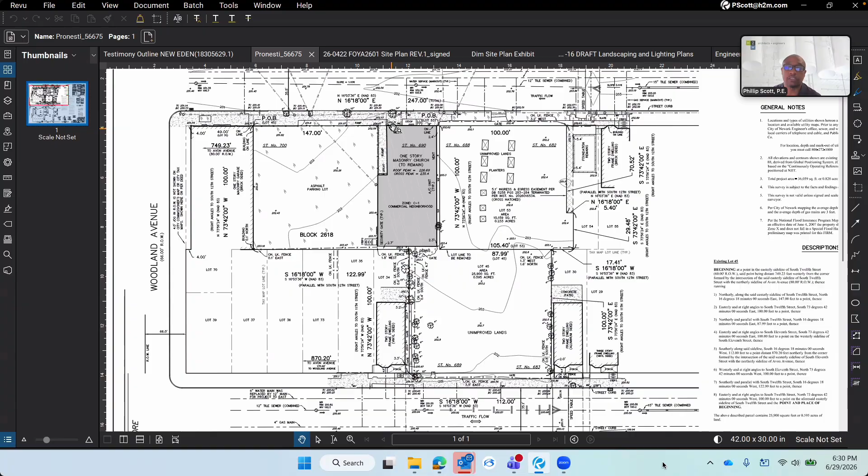One thing mentioned in the engineering review is that we have some encroachments into the right of way, shown here. There's a handicap ramp in the right of way that allows accessible people to get up into the church, and there's a stoop, which is the front stairs to the church. Both of these are existing and have been here for many years. As part of this application, we will address these encroachments as best we can.

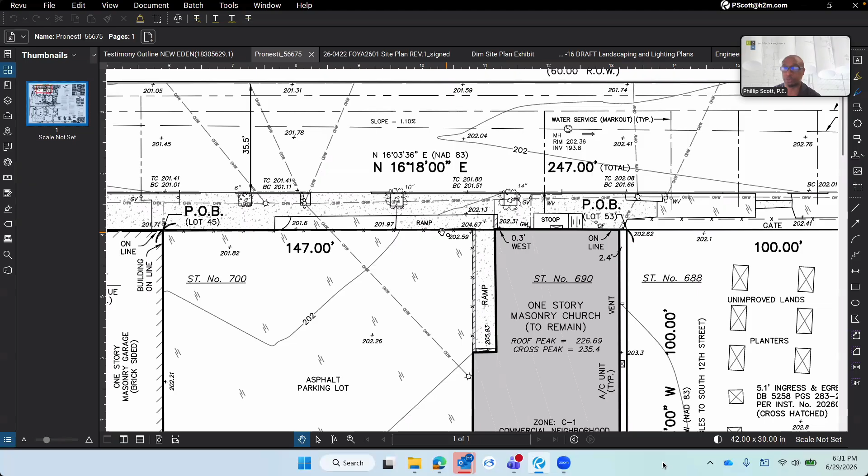Going down to the subdivision plan, all we're really doing is proposing this new lot line and removing the previous lot line. The total area of the project will remain the same - we're just reconfiguring the lot to make room for the new multifamily apartment building.

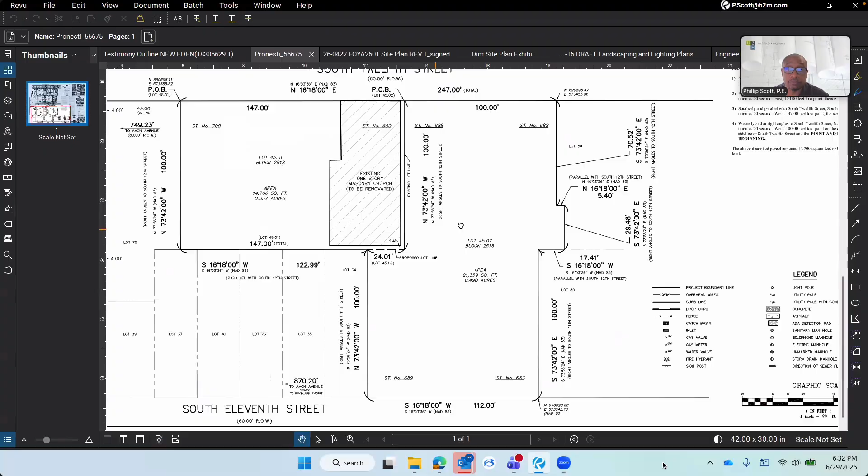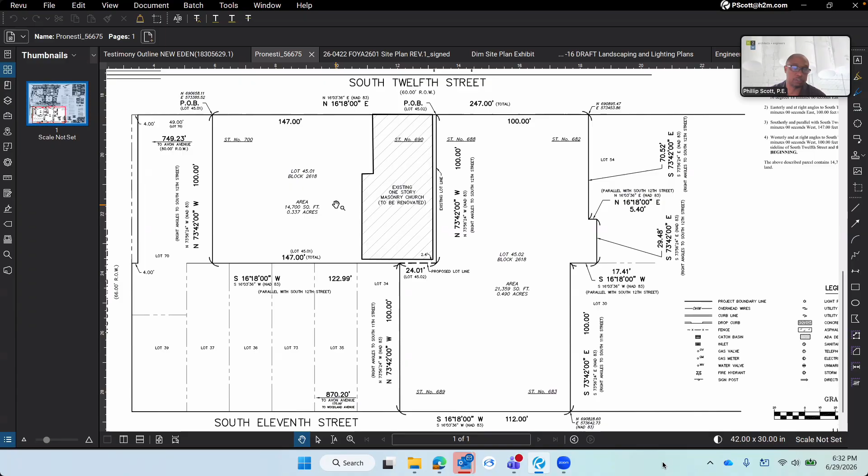Mr. Scott, just to clarify, the existing two lots, 45 and 53, will be joined, and the new lot 45.01 is where the existing church and associated parking will be, correct? That is correct. For the church lot, 45.01, the area will be 14,700 square feet or 0.337 acres. The new multifamily building lot will be 45.02, with 21,359 square feet or 0.49 acres, just under half an acre.

To your knowledge, Mr. Scott, there are no easements or title issues related to those two properties, correct? That is correct.

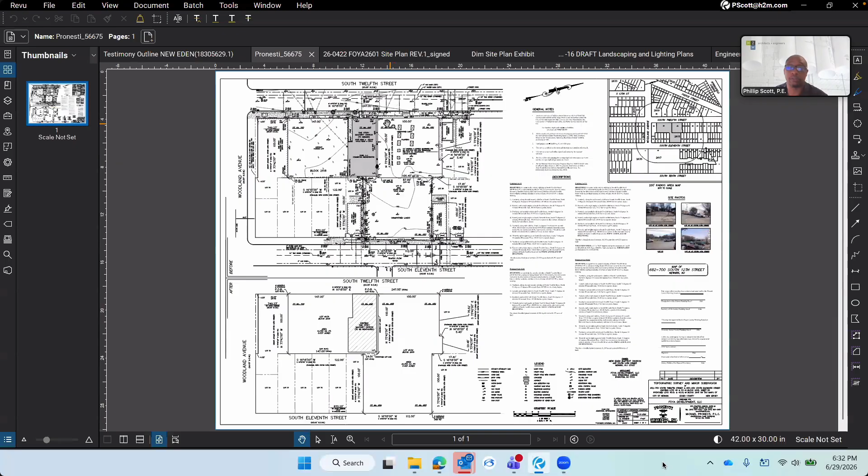Moving on to the site plan prepared and submitted as part of this application - when we initially made the submission to the city, we did not show any improvements on the church property. As part of the review, they asked for a few things, including striping the actual parking lot, which currently has no formal striping. People probably park the best way they can on days there are activities at the church. We are now showing striping providing, I believe, 22 spaces on this plan.

There has been another revision since this plan was done, which I'll show later as an exhibit. Another request was to create a buffer between the church property and the residential properties in this area. So we are providing a 15-foot buffer, cutting back the asphalt of the parking lot to create this area, which we will landscape, as shown on one of our later plans.

Additionally, with this plan, as we mentioned, we're proposing a new building. It's a fully affordable, 100% affordable apartment building that's going to have access from both South 12th Street and South 11th Street. They'll be able to access either way, in either direction, and can go both in and out onto South 12th Street or South 11th Street.

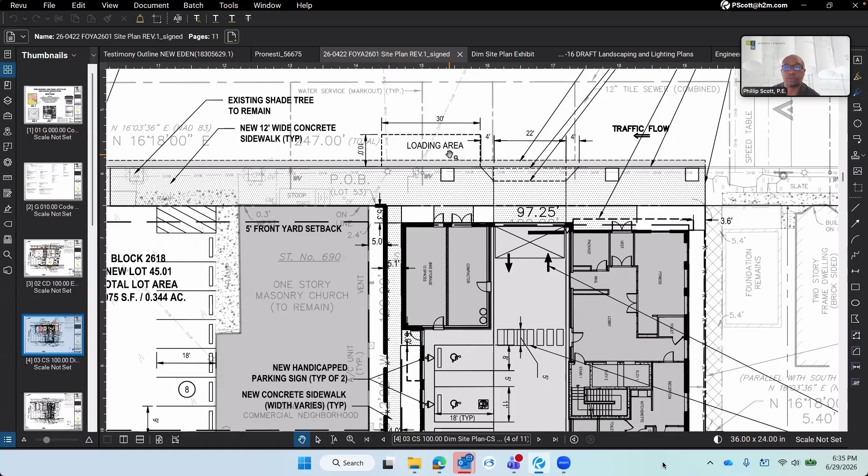In our plan, we are showing a loading zone, which we are fully prepared to make an application for to the Department of Engineering, Division of Traffic and Signals, if this project were to be approved. This is an area so that we can have loading and unloading for people coming to either the apartment building or the church.

Also with this plan, we're proposing a new curb and new sidewalk along the entire frontage of both the church lot and the apartment building lot on both South 12th Street and South 11th Street. And we're also proposing a play area for the children who will be living in the new apartment building.

We will also be proposing to make our utility connections onto South 11th Street. We'll have our two water connections, our sanitary sewer connection, as well as a doghouse manhole that will connect our overflow from our stormwater system. As part of that, we know that with the number of connections we have, we're willing and ready to pave the street along our frontage as required by the city.

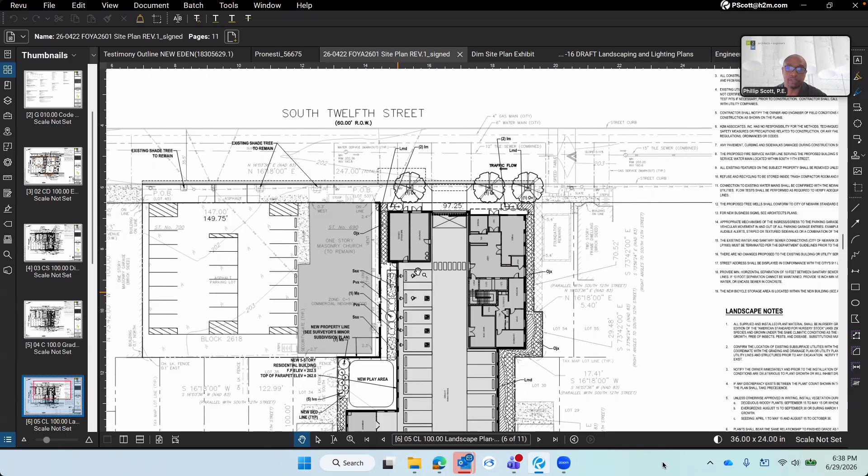Okay, so our next plan is our landscaping plan. This is the plan that was submitted after our TRC meeting - I'm sorry, prior to our TRC meeting. As you can see, we have some street trees along South 12th Street, in accordance with the city's ordinance on street trees. We're providing landscaping as best we can around the foundation of the building, all the way around, and we're also providing the same street trees along the South 11th Street frontage.

As part of the TRC meeting that we had with the city, there were certain requirements that they asked for with regard to improvements on the church lot. So I had prepared this exhibit, which is shown here.

If I can, Mr. Scott - I apologize, Mr. Black, I'm going to mark this as A1, the revised landscaping plan. Okay, thank you. This plan has already been submitted to the city and has been reviewed by the Department of Engineering.

As we can see here, we still have all of the same landscaping, but in this area where a buffer was requested, we're providing plantings along here as well. We also show some plantings along this area here, but there's been some changes and we're still working through it. We'll work with the Department of Engineering to see if we'll still do this landscaping or if they'd prefer we widen the drive aisles a bit, as mentioned in one of the comments in the review letter.

That's our landscaping plan. Our next plan is our lighting plan. We have interior lighting in the apartment building. Mr. Scott, I apologize, I just wanted to go back.

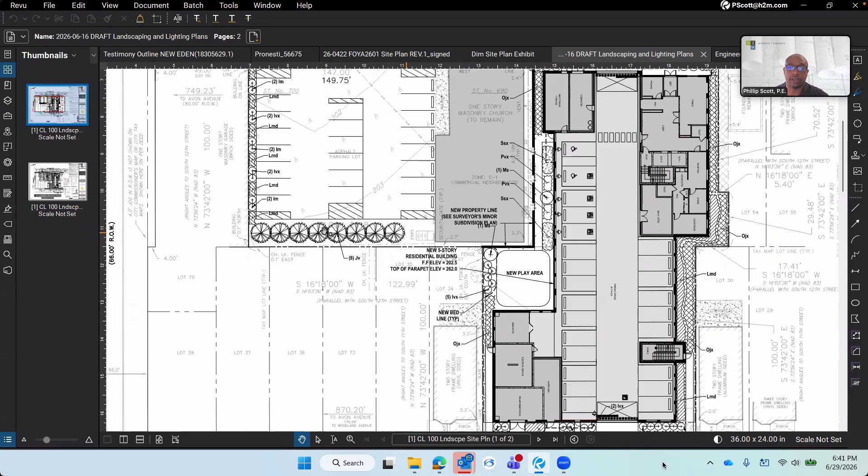Not a problem. You had indicated that the buffer area proposed along the rear, abutting the residential properties on South 11th Street, will extend all along the back of the parking lot, correct? Yes, that is correct. Parking lot, not garage -- the parking lot along the back of the paved lot for the church, correct? Yes, this area here, which right now is all paved up to the property line. We will be cutting that back and adding this landscape area. Okay, great.

So I'll move on to the next plan, which is our lighting plan. In the garage, we have lighting. I believe there were some comments from the engineer about excessive light spilling out of the garage, which we're willing to adjust and make whatever changes are recommended by the Department of Engineering.

As part of our TRC meeting, they requested we show the existing lighting in the church parking lot. So we modeled the lighting for the church parking lot, and we have a little bit of a dark spot over here in this one corner. We have, it looks like, 3 or 4 different locations where we're under the minimum of 0.5 foot candles.

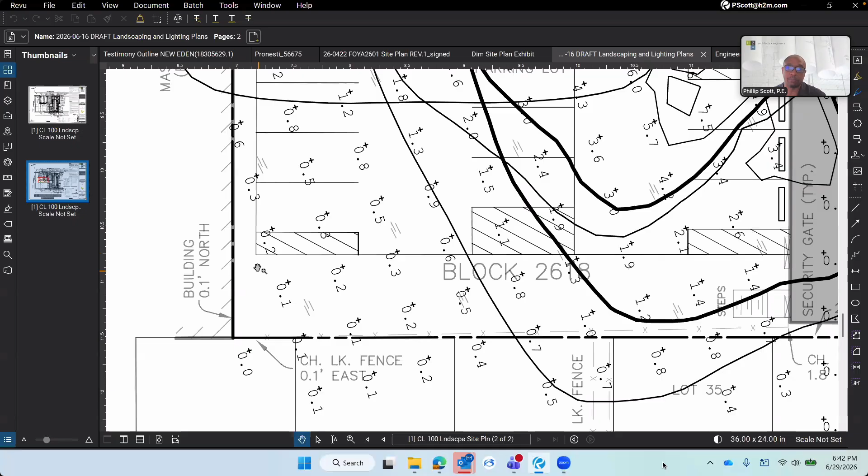One of the comments from the Department of Engineering is that we add a light pole in this corner. It's a bit much of a task to ask the church to run a new pole there. So what we're going to do, and we'll model that as part of our resolution if we're approved, as a condition of the resolution, is look to maybe change out one of these fixtures so we can get enough lighting to cover this one little dark spot in this corner.

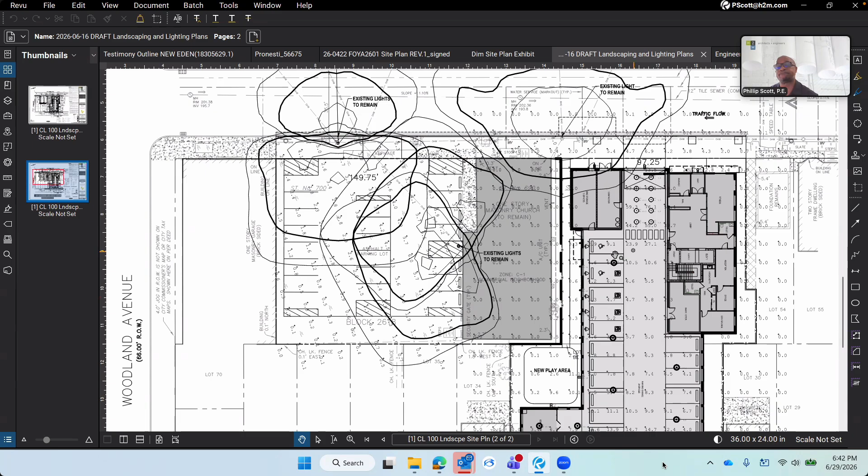So it'd be fair to say that for the lighting on the proposed lot 45.01, we will try to work with the city to ensure we can satisfy those lighting requirements, correct? That is correct. Okay.

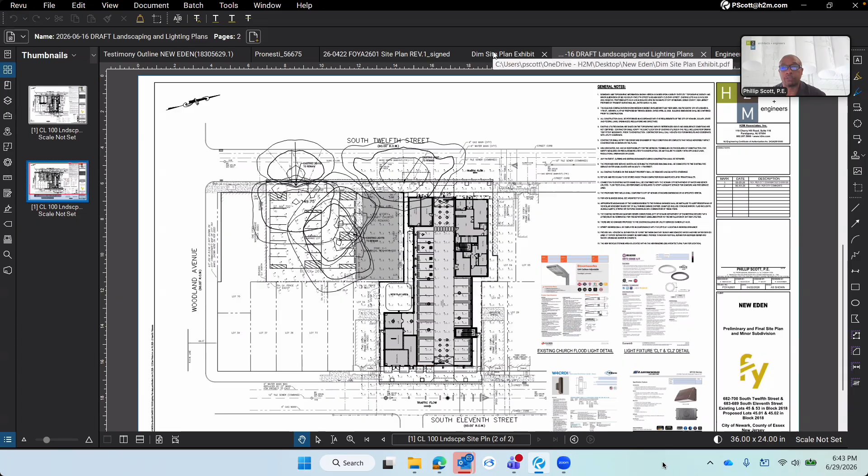There's one other thing I mentioned before, and that was us relocating the handicap ramp on site. So on this plan, this would be another exhibit which was not submitted to the board, but was prepared in preparation for this meeting.

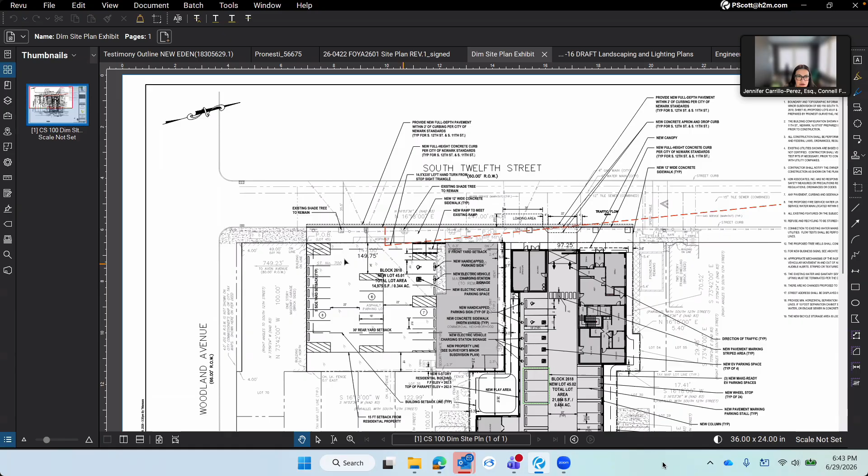Thank you. This plan here, we will work with the Department of Engineering. As I said, we tried to expand the drive aisle as much as we can. We were able to get 22 feet as opposed to the 20 feet we previously had. We moved the handicap ramp, which was out here in the right of way, which was an encroachment. We moved it on site so it will no longer encroach on the property, but we did lose one parking space.

The current requirement for the church is only 15 parking spaces. In our previous plan we had 22 spaces. Now with this plan we show 21 spaces. But with this plan we have a van accessible handicap parking space here, and an EV electric vehicle charging space here, which was also requested by the city's professionals.

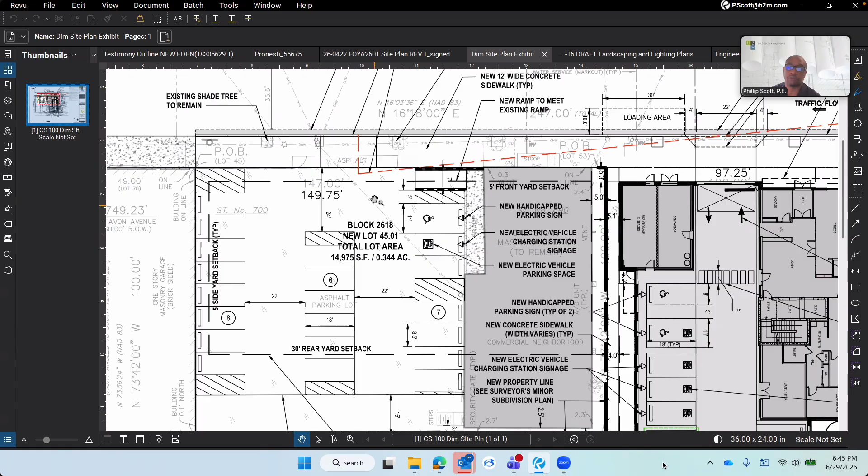The one good thing about this plan is that, yes, we lose one parking space, but we now take the handicap ramp out of what is shown here in red, the sight triangle. This makes for a clear line of sight and a much safer situation for drivers pulling out of the driveway. And that pretty much concludes my testimony.

So I just have a few clarifying questions. As it relates to 45.01 on this lot, the EV make-ready space, one required, we agree we will comply, correct? That's correct. The parking spaces, you indicated our original submission had 22 spaces. We did a modification to remove an encroachment, which allows us to still have 21 spaces, and that is adequate given the space of the existing church, so no variance is required there. Is that correct? That is correct.

Okay, great. The landscaping, we went through that earlier with the buffer area and the trees. I just wanted to clarify there's no variance required on site. The shade trees, there are 4 required, and I think we have 3 that are pre-existing. Is that correct? Yes, I will go back to that plan if you'd like.

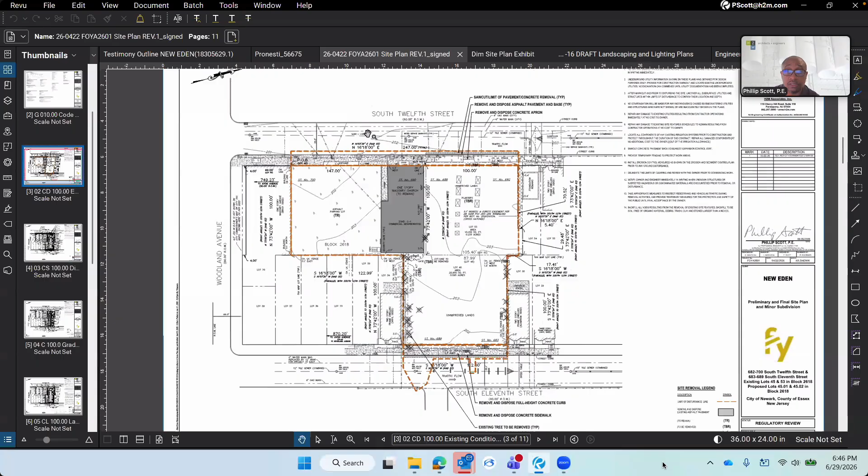So yes, there are existing trees. It's a little hard to see on this plan, but there are tree wells and tree pits along the frontage of the church property. So yes, there are 3 existing trees, and we show new proposed trees as well.

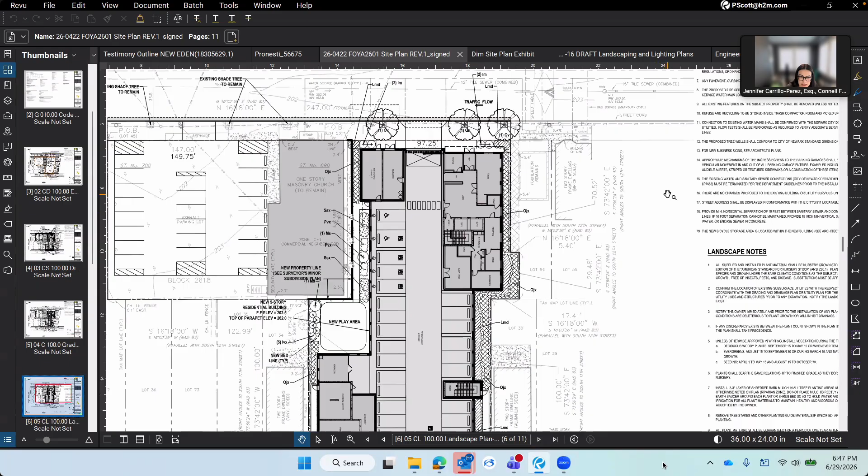One of the comments in the reports we received from the department, I believe from the planners or the Department of Engineering, is that we will agree to work with the city arborist as it relates to the species and location of the plantings. Is that something we can confirm on the record we're agreeable to? Yes, we are totally agreeable to that.

Perfect. Just clarifying, as it relates to the lighting, both on the existing lot where the church is and on our new project, we will comply with the lighting. Is that a fair representation of your testimony? Yes, that is correct. The encroachment as it relates to the concrete ramp, you've indicated that will be relocated, correct? That is correct, yes.

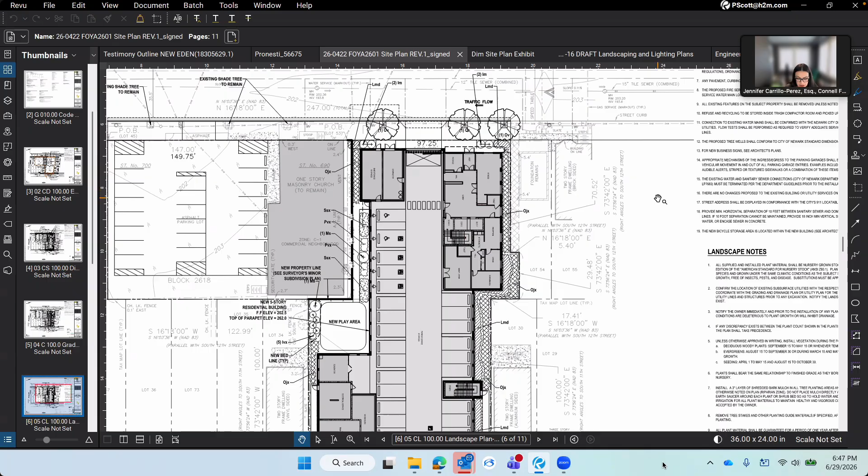And I think there was some testimony requested from Mr. Traficante's report as it relates to the chain link fence at the rear of the property, adjoining lots 36 and 37. Yeah, there's a chain link fence, it looks like it's here. I believe it's lots 34, 35? Yes, the chain link fence shown here is existing.

And that will remain on the property, is that correct? That will remain as long as the professionals allow for it. If they require us to make a change, I can't speak for the developer or the church, but we're not touching anything in that area, so we feel it can remain.

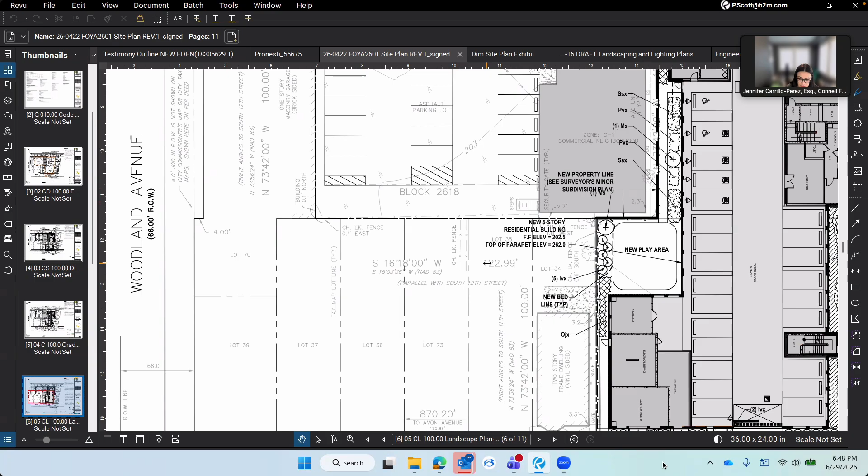There's another comment regarding an encroachment with an existing building on lot 70 that crosses very minorly, by 0.1 feet. I'll certify on the record that the applicant church, maintaining ownership of the lot and building, will work with their neighbors. It is so minor, I think we will certainly address it during resolution of compliance, but I wanted to address it since testimony was being requested on that.

As it relates to the new building proposed on 45.02, you walked through the landscaping plan. We discussed the lighting plan will comply, is that correct? Yes, we will comply. And you discussed briefly the parking lot, but we do have our traffic expert who will go through the details of his study, including the curbs.

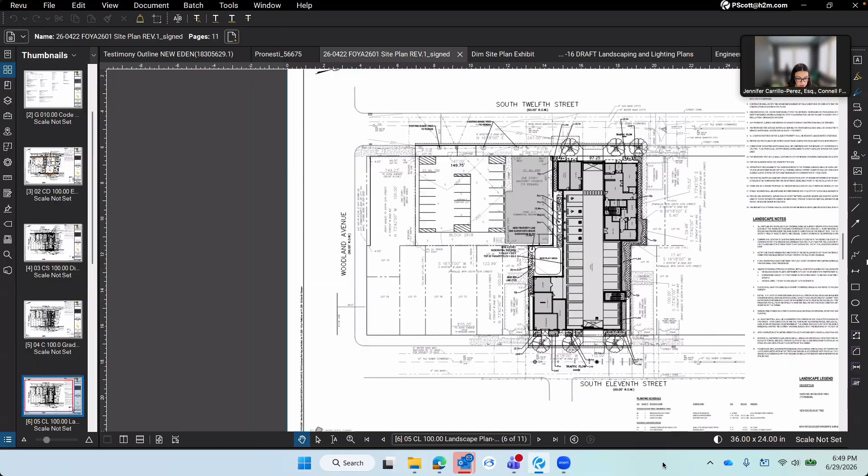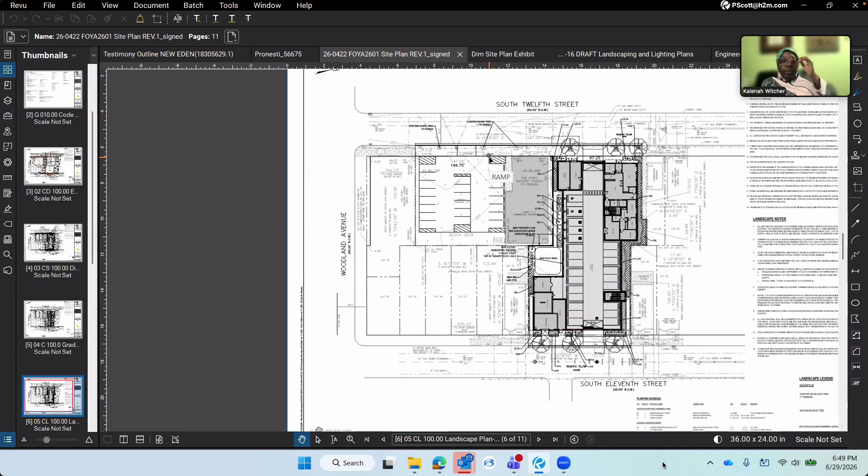You had the opportunity to review the Department of Engineering and the planner's memo, correct? Yes, I did. And with the exception of those we went through, is there anything else you don't think you can work or comply with from those departments and the recommendations that were requested? Outside of the things I mentioned in my testimony, I think we can comply with everything else in those letters. Thank you, I have no additional questions. All right, Mr. Scott, if you could please relinquish the screen.

I have a question. My question is, how many of the variances did we just eliminate? Are you keeping count? Unfortunately, I'm not keeping count, but we will have a professional planner who will provide testimony at the end, and he will give a summary on the variances that will still remain, that we will still be requesting for this application.

I can tell you the variances related to lighting have been eliminated. So that's the illumination, walkway illumination and building entrance. Correct, all illumination variances — I think there were three or four identified, both in Ms. Gruel's report as well as Mr. Traficante's. We will work to eliminate those variances completely.

We still have a variance related to the drive aisle width — 24 is required on that one lot, 45.01, but we are increasing it, so it's 22. And the setbacks remain, and we still have additional testimony that will provide more information. But it should also be noted that the parking count is now 21 on that one lot, since we've relocated that encroachment, so that encroachment has been eliminated.

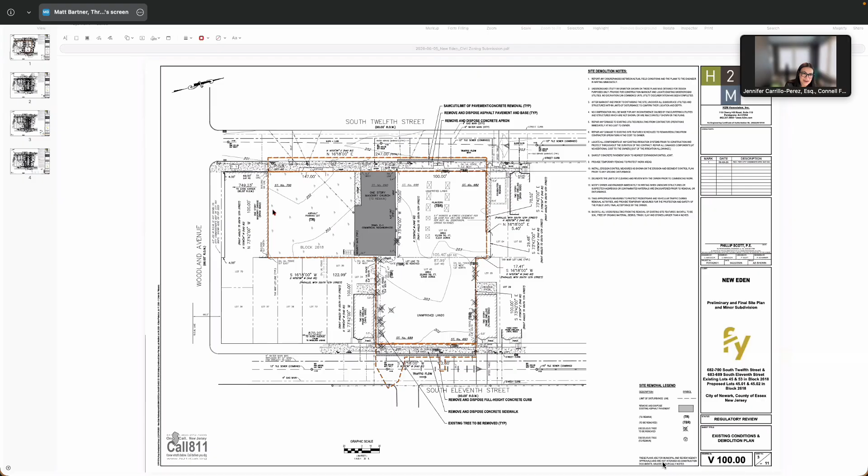Thank you. I just want to make sure everyone has seen my screen with a floor plan on it. You can, yes. Okay, great. So thank you, members of the board, for having me here to talk about the project. I will try not to repeat the testimony from other professionals as we're getting into the second hour of the hearing tonight. The building is located on the South 12th and South 11th Street, 600 block of those streets. My plans today are rotated 90 degrees counterclockwise from what we saw in the civil plans. So 12th Street is on the left-hand side, 11th Street is on the right-hand side, and north is upward on the site. We've talked about the number of apartments, and I'll get into that further as I walk through the plans.

To begin on the ground floor, on the 12th Street side of the building, we have our main entrance to the apartment building, which includes a vestibule and a lobby with space for residents to gather and congregate, as well as wait for a ride or somebody that they'll be meeting. We also, on the street side, have the entrance to the parking garage that we've discussed previously. Moving south from there, there is a trash compactor and a recycling collection room. Trash receptacles will be stored inside this building and then pulled out through double doors by the trash truck provider when they're ready to pick them up.

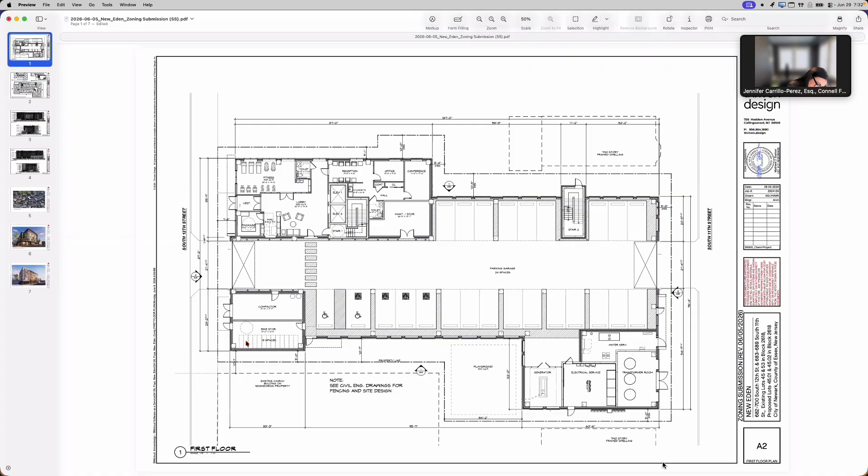The building itself is set back on 12th Street and 11th Street from the property lines approximately 5 feet. In both cases, we were trying to give a little bit of room to the public realm outside of the building, since this is a taller building than some of the other adjacent properties. We also tried to align, particularly on 11th Street, where the fabric is more intact across the street, with the mass of those buildings, although they each do have some porches that project closer to the property line, which sets the official required setback. We kept the mass of our building aligned with the mass of those adjacent buildings to maintain the desired streetscape image.

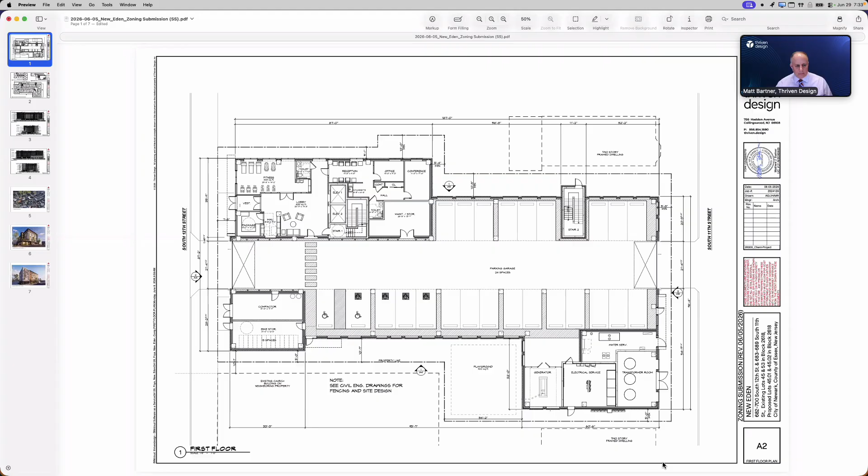All right, I will move to the upper floors of the building. On the upper floors, primarily this is focused on the apartments for the residents. So on the second floor, we have 10 apartments, and then on the upper floors, 3 through 5, we have 11 apartments. The difference in that one apartment on the second floor is in this area here, adjacent to the stairs.

We have a large community room for use of residents. That includes a kitchenette within it, an area for computer use by residents and children in the community room, and 2 bathrooms to serve the users of the community room. On the north side of that community room, on top of the roof of the management area, there is a roof deck outdoor space for residents.

As we'll see in some of the elevations of the building shortly, we're focused a lot with this building on creating softer green edges to the building and the spaces. One of those is at the roof deck, which allows us to screen the deck from the adjacent properties so that there's no disturbance between users of the roof deck and people that might live directly next door.

On these upper floors, the two elevators mentioned previously from the lobby, as well as the stair, come up to an elevator lobby with a small sitting area. Then we have a number of apartments around the whole perimeter of the floor. Across from the elevator lobby area is a trash room, which has trash chutes for recycling and for trash, so that those can be collected down in the compactor room on the first floor that I mentioned earlier.

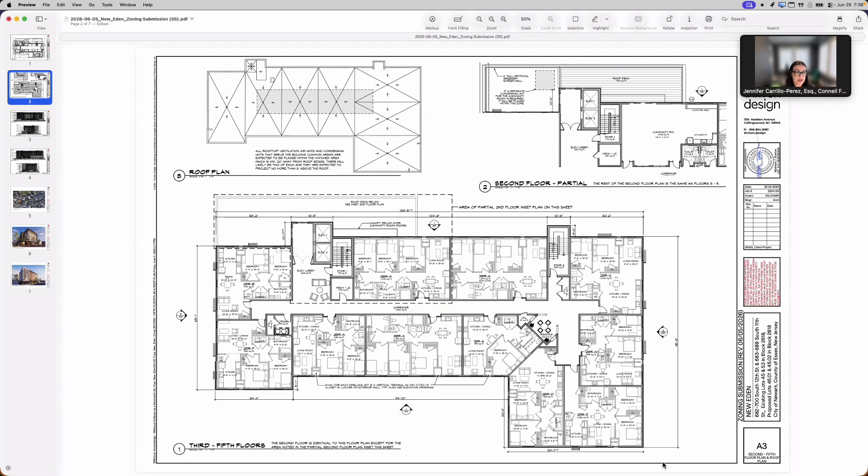If you can just proceed now on that. I think if we can go into building materials and signage, yes.

Not to spend too much time on this, but with the design we wanted to create something that was in scale and of a type with other new development happening throughout the city and in the South Ward. I talked earlier about some of the setbacks aligning with adjacent properties where we could.

The building itself is a mixture of brick, red brown brick at the base, obviously a very common material in Newark, as well as fiber cement panels up above on the upper floors. The lighter areas of fiber cement have a variation in the tones of grays and browns to give a little bit of variety.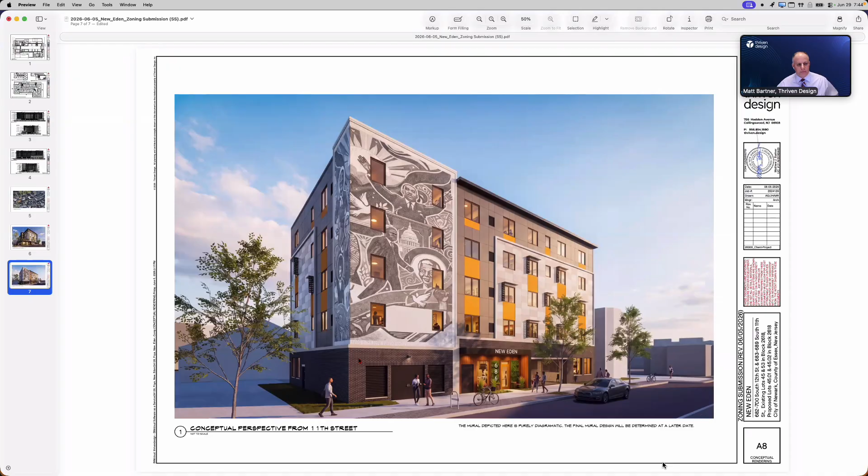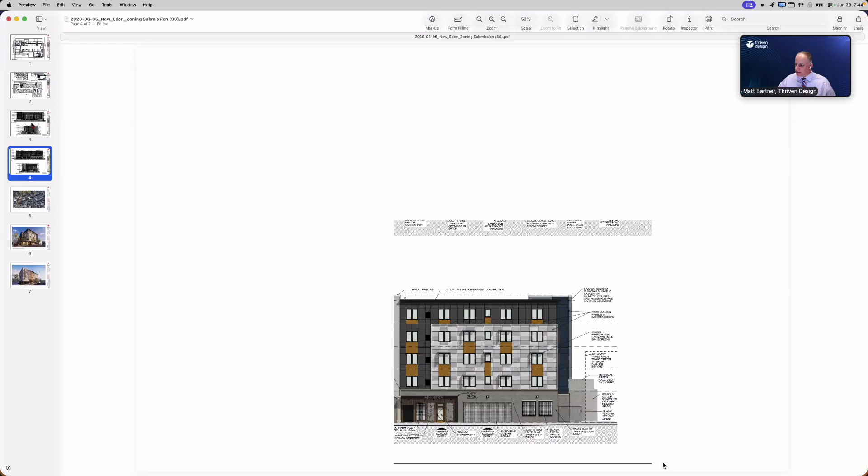On the long sides of the building, which face the other lots on the north and south sides—I apologize, this will just need a minute to queue up.

Again, it's a similar mix of materials with brick at the base on the ground floor, fiber cement panels, the dark windows at the upper floors, and a mix of whites, tans, blue, and a darker gray.

The garage itself has many openings all around its perimeter where we have exterior wall. Those openings will be filled with a screen material to keep the garage secured from the exterior, but still allow light and air in, so it doesn't feel like an enclosed cave type of garage.

It's much more open. This is the north elevation, the north side of the site, and the roof deck is here, in the center at the second floor.

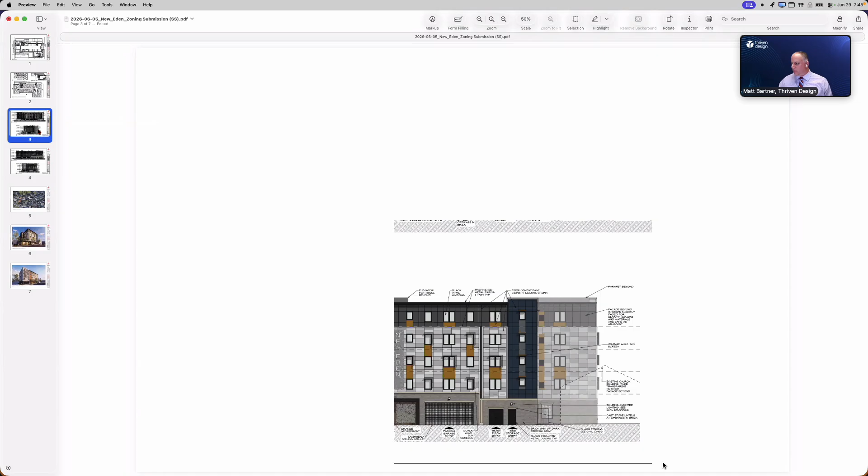And then on the south elevation—pardon me, it takes a second to load. Here we go. Again, you can see all these openings for the garage to provide light and air into the garage, and then the upper floors with the apartments as well.

As far as some of the other features, and this addresses some of the items in the review letters, these buildings, by virtue of being funded by low-income housing tax credits, will comply with Energy Star requirements and the Enterprise Green Communities criteria program as well.

The roof will have a high SRI. Plumbing fixtures will all have low flow and use less water than typical code minimums. The building will be built with recycled materials, and we'll also be recycling construction waste during construction to reduce landfill. All materials used in the building will address indoor environmental quality, with low emittance of volatile organic compounds, contributing to good air quality for people with conditions like asthma so they can live more healthfully in the building.

Mr. Bartner, you've had the opportunity to review the reports from both the engineer and the planner, correct? Yes. And as it relates to items within your expertise as an architect, is there anything that would prohibit you from making the modifications or recommendations they're suggesting? I'm looking here just to double check.

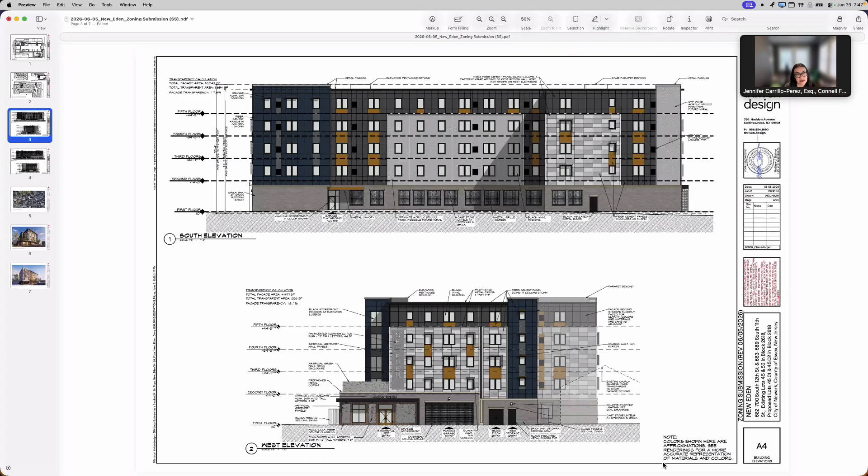No, there's not. And just to clarify, the variances being sought as it relates to transparency will remain, correct? Yes, as we proposed here. And then there was an additional variance as it relates to the signage at the initial application. Because there are two street frontages, three signs were being proposed, and the ordinance only permits one, correct? Yes, on South 12th Street, the image we're seeing here, we have three individual signs: one that says New Eden vertically, one that has New Eden horizontally, and the street number, 686.

Based on the review letters, are there any modifications being made to the signage proposed? Yes, we'd like to propose removing the larger sign that runs vertically and maintaining signage above the entry and signage to the side of the entry. So reducing from three on this frontage to two signs.

So just to recap, instead of three, we're proposing two, the side signs, and the actual area of the signage, you're agreeing to reduce it to comply with the ordinance. Is that correct? Yes, that is correct. So we'd be removing that one variance as it relates to the excessive signage area, correct? Yes.

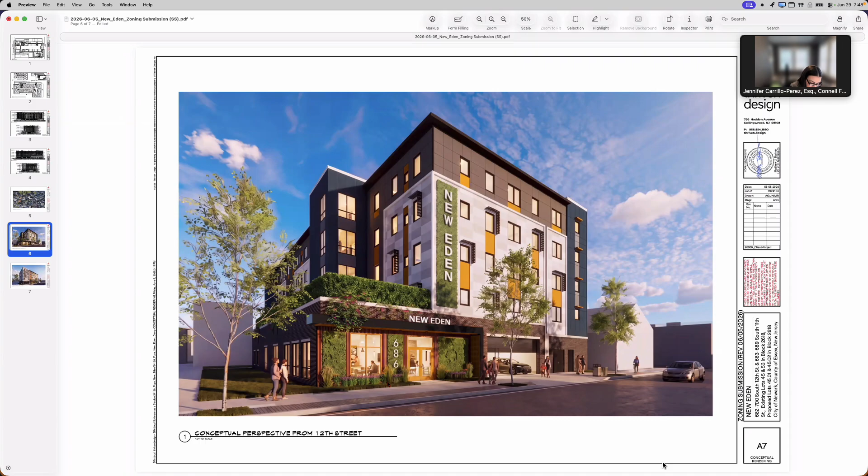Just for clarity, I apologize. I have no additional questions. Thank you.

If you can relinquish the screen. Oh, absolutely. Give me one second. Oh, good. Are there any questions from professionals or commissioners for this witness? No questions. I think it's a nice project in that area there, Dan.

Thank you, Commissioner Purdy. Does that complete? No, Matt Flynn is the next professional. Correct, my last witness is Mr. Flynn.

I'm still here, I can't see myself. But, oh, there we go. Mr. Flynn, please raise your right hand. Do you solemnly swear or affirm that the testimony you're about to give will be the truth and nothing but the truth? Yes, I do. Please state your name, spell your last name, and state your affiliation for the record. Matt Flynn, professional planner. You're accepted by the board. I was just going to note his license is still current from a few hours ago, an hour ago.

Thank you. Mr. Flynn, you've had an opportunity to review the plans and the property, correct? Yes. And you have heard the testimony presented this evening noting the revisions being proposed, correct? Yes. Given your understanding of the relief being sought, that being the subdivision, the site plan, and the variance, can you provide an overview as a professional planner on the justification for the subdivision, site plan, and variance relief?

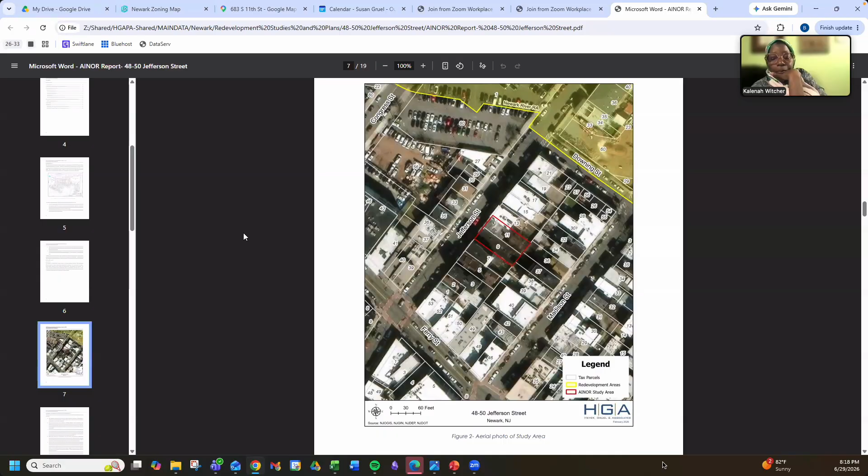All right, Commissioners, do any of you have any questions with regards to this application? Brooke, if you could please give us the screen back. Thank you. Any questions from members of the public with regards to this application? Do you see any hands raised? Seeing none, Madam Chair.

All right, so at this time we would like a motion to be presented. Motion to move it. Second. Okay, moved by Commissioner Purdy and seconded by Vice Chair Miles. Nope, Commissioner Austin. Oh, there you are, Commissioner Austin. Pardon me. Miles, no. Moved by Commissioner Purdy, seconded by Commissioner Austin.

Madam Secretary, roll call please. Commissioner Austin, yes. Commissioner Purdy, yes. Commissioner James, yes. Commissioner Scott Roundtree, yes ma'am. Commissioner De Silva, yes. Commissioner Spade stepped away. Commissioner Miles, yes. Madam Chair, yes. So the application is approved.

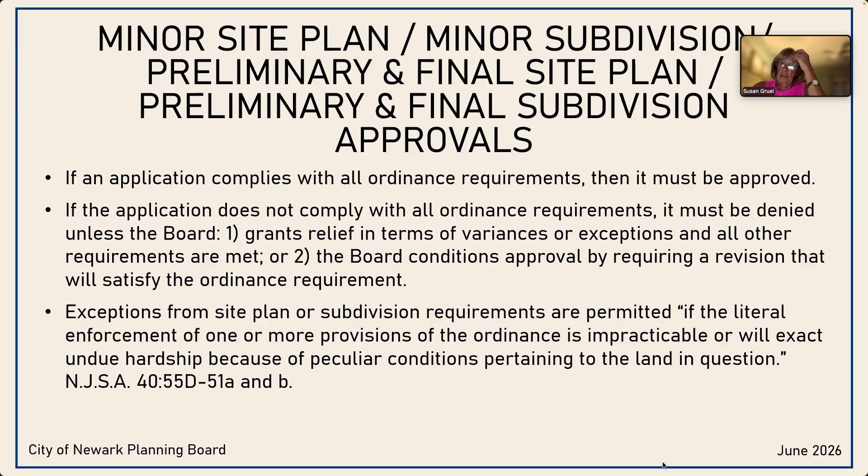Okay, Brooke, if you can forward. Okay, so we talked about the C variances, bulk variances, because you constantly have applications with variances. The one that seems to be fairly consistent, and we won't get into the merits of it, but I'll just say the undersized lot scenarios - that under the current ordinance would be a C variance. And as you know, because you see the testimony on it all the time, there is positive and negative criteria that's set up.

See, there's 40:55D-70C - I don't think there's a C in there, but that's where the C comes in, because that's under the Municipal Land Use Law. That's the statewide law that provides the basis for every municipality to follow. But you have to balance the positive and negative criteria.

And what we put here is zoning by ordinance, and not by variance, is preferred. So if you find that there is a wholesale change with granting C variances, that's not really the best way of addressing the application or the goals of the master plan. It's got to be very specific to the property, pretty much, as to how this board evaluates C variances.

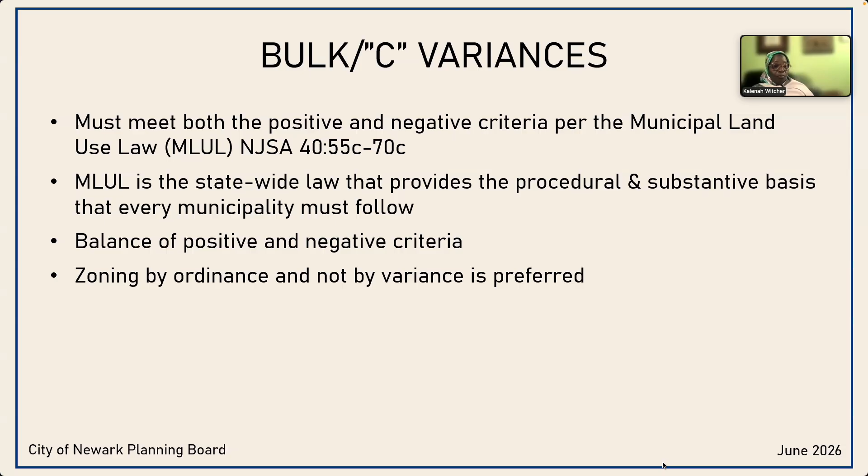This is a conversation for us to have and to also include Ms. Shinday. Would you like, Madam Chair, would you like us to continue since we've been going? Please continue. Okay, so we're going to go to what is considered the positive criteria.

There are two, and you've heard planners testify on this: the C1 hardship criteria, where there are specific physical conditions of the property that create a hardship in meeting whatever that standard is. And most of the time, at least since I've been involved, what you've heard are the C2 flexible criteria, which is that the application would be advanced by a deviation in the zoning ordinance, and the benefits would substantially outweigh any detriments.

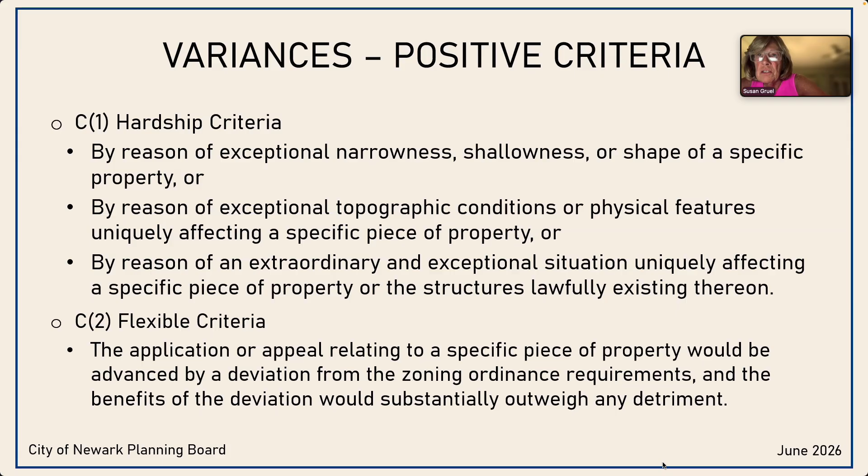That's what you normally hear, but under the flexible C2 criteria, you have to reconcile that with the purposes of zoning. Those are, Brooke, the purposes of zoning, and that's under the Municipal Land Use Law again. What we've done, and you've heard it from the planners, there are a number of purposes of zoning identified in the Municipal Land Use Law, actually listed here on 2 or 3 pages, and that's what many of your planners rely on for these applications.

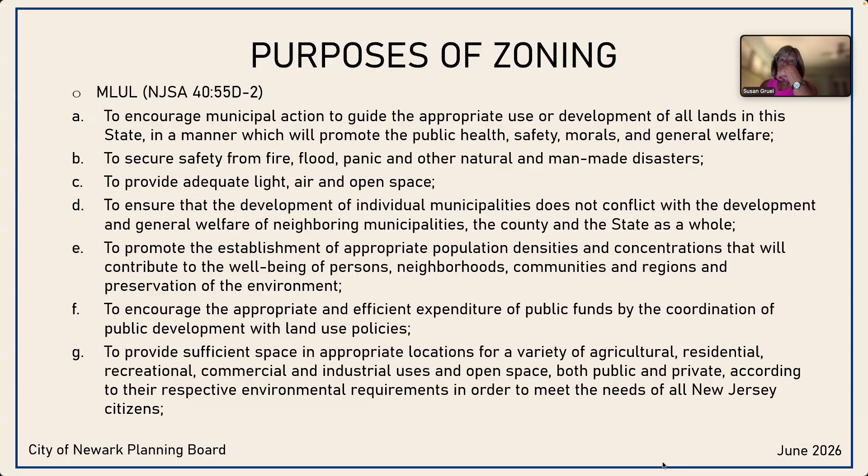They reference, say, G, they reference D, whatever it may be — Brooke, if you can continue — there we go, M: coordination of public and private procedures and activities, lessening the cost. They reference those as the purposes of zoning, which is the C2 aspect of the positive criteria.

Now, we are assuming — although tonight this happened, and I thought we didn't put it in here — inherently beneficial uses, that is a term that applies like a church or a 100% affordable project; both of those are considered inherently beneficial uses. And if they are inherently beneficial uses, they in and of themselves meet the positive criteria under C variances.

So that in itself, but that's unusual. Normally it would have to be through a private developer and not inherently beneficial. But it can't be just for the benefits of the applicant.

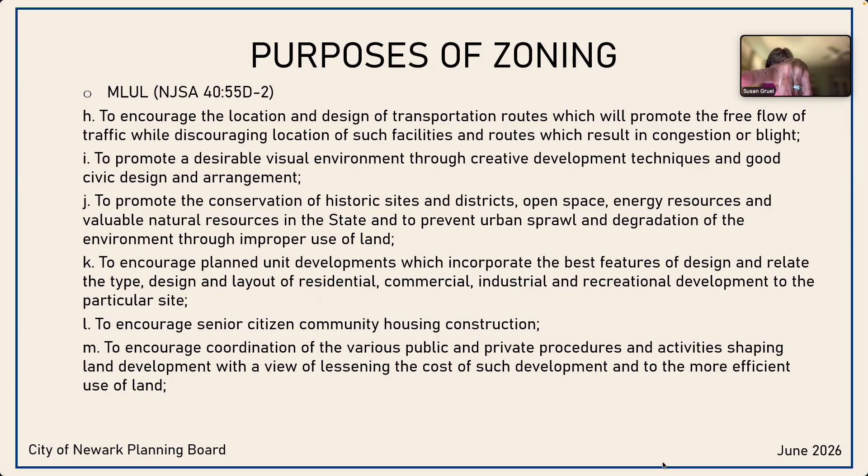It has to go to the public welfare, and that's where the negative criteria comes in. So we talked about the positive criteria, and then they also have to meet the negative criteria. And that is that it's granted without substantial detriment to the public good, which is really impact on the surrounding properties or area.

And that it's granted without creating substantial detriment to the master plan again. This is where the master plan comes in. So you'll note, most of the planners that testify in front of this board know what they have to provide for the basis for their variances, so they talk about these things. But these are very important aspects that have to be evaluated. And again, it can't be based upon the benefit to the applicant. It has to be based upon the benefit to the public.

So, Michael, I don't know whether there's. Yeah, it's always the case, it has to be a better zoning opportunity for the public overall, the community overall. And even with the C1 hardship criteria, it can't be a hardship that the applicant created.

Yeah, it has to be something that's existed and it's unique to that property. But even then, it can't be something that, they subdivided the lot and made it too shallow or too small, and then they want to put something too big on it. It wouldn't meet those standards.

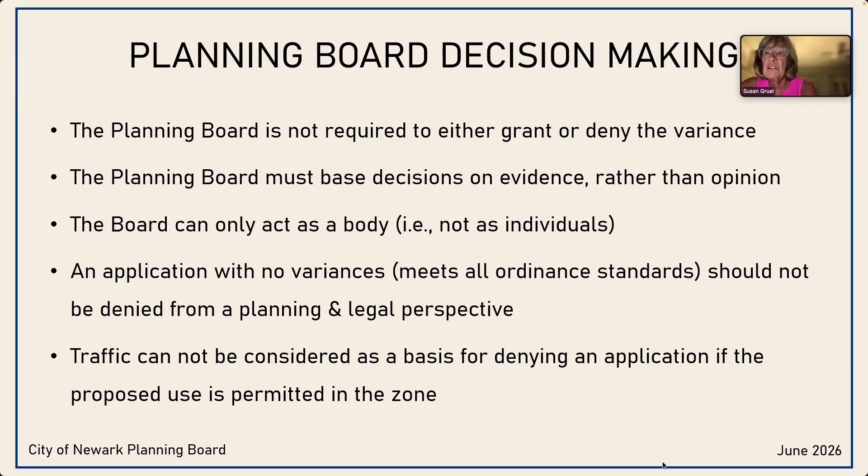But okay, Brooke, if you can, and this is just real quick, the redevelopment planning process. Now that's not under the municipal land use law. That's a separate statute that deals with statutory redevelopment, which sometimes people get all confused about.

If City Council designates the area, and that's by normal resolution, you are the ones that hold the public hearing. They don't have to have a public hearing on it, where it's noticed and everything. Then a redevelopment plan is created, and City Council can either create a redevelopment plan or they can ask the planning board to, and it's adopted, but one way or the other, it's adopted by ordinance by City Council.

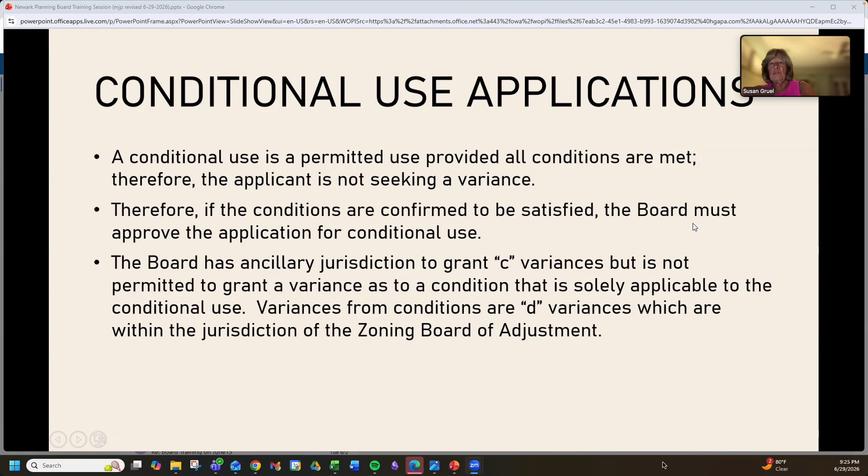Sorry, Mike, I just put on the corrected. No, there was, no, that's not it. That's not it either. No, there, yeah, that's it.

Technically, every action of the board should be voted upon. So, even, let's say adjournments - if someone comes before the board and they're gonna request an adjournment, the board should determine whether or not they're gonna act on it, whether they're gonna approve the adjournment request. It's not necessarily something that's administrative. There may be instances where a member or certain members don't agree an adjournment is justified, and they may vote no. We don't know unless you take the vote. So technically, every action of the board should be voted on.

I think too, with resolutions, even though it may be somewhat of a pain, they should probably be voted on individually, because only the members that voted for the action are allowed to vote on the resolution. And if there is a question with respect to the voting, it may be a procedural basis for the court to send it back, which hurts, doesn't look good for the board, and it hurts the applicant, especially if it was an application that was approved, because now they're just gonna have further delay.